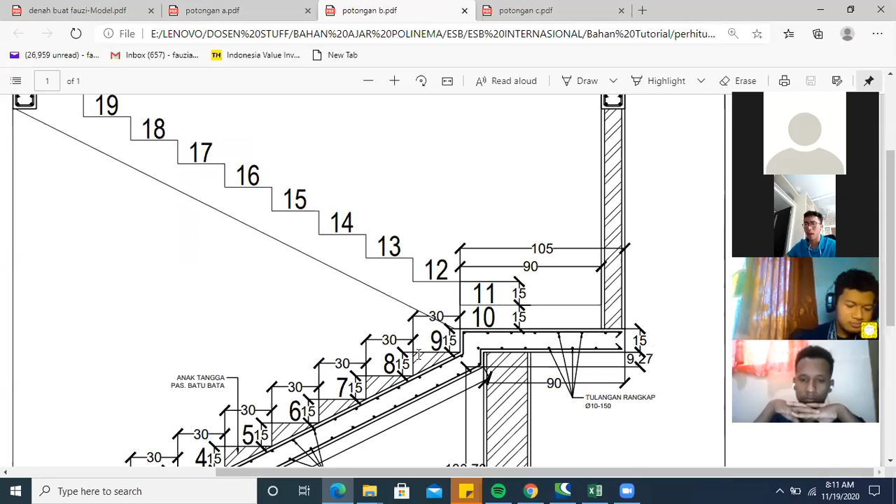Okay, there's two types of stairs. The one is the stairs using footsteps, atau anak tangga di sini ya. Footsteps using the bricklaying. Based on this drawing, this is the example of the stairs commonly used for house construction. They use the bricklaying as the footstep.

But another one, there is a footstep using the concrete, like what we saw in the previous project yang kita kemarin ya, minggu lalu itu. In the last week, we already went to the project where the stairs use concrete.

What's the difference? The difference is when you use the stairs for an ordinary house, you can use footsteps from bricklaying. Meanwhile, when it's a building where a lot of people use it, you have to use footsteps from concrete. And of course, if you use concrete inside the footstep, you must put some reinforcement.

In this drawing, if the contractor uses reinforcement, the position of the reinforcement will be like this one. Okay. This is the example if the footstep uses reinforcement. Okay. Is that clear, guys?

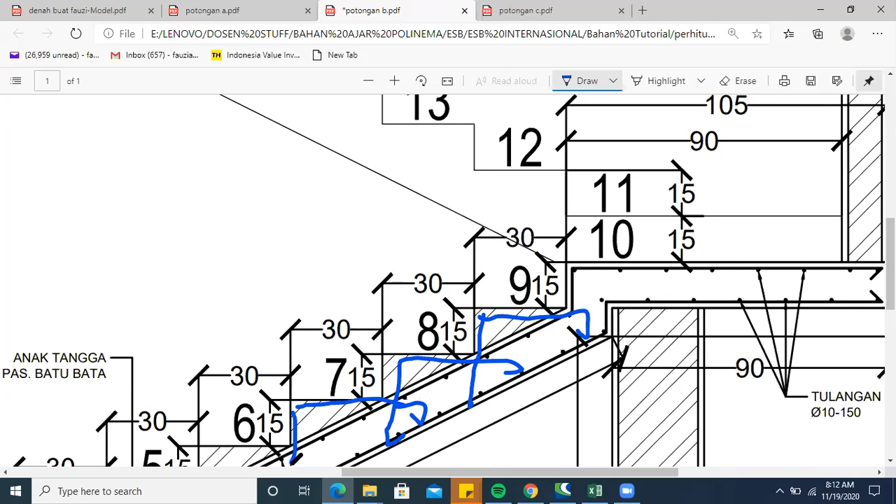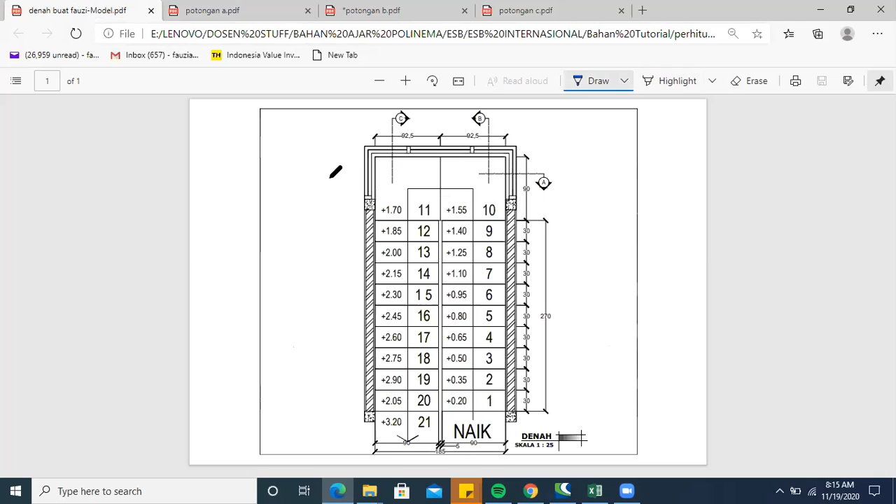Jadi bisa baca gambarnya ya. Because this drawing makes a section like this ya, ingat ya panahnya ke sini, maka kita akan seolah-olah melihat dari arah sini. We will see from this point of view. Okay. Nah, this is the detail after we make section B. Based on this drawing, we also get the information that this is the form of the reinforcement that we will use for this structure.

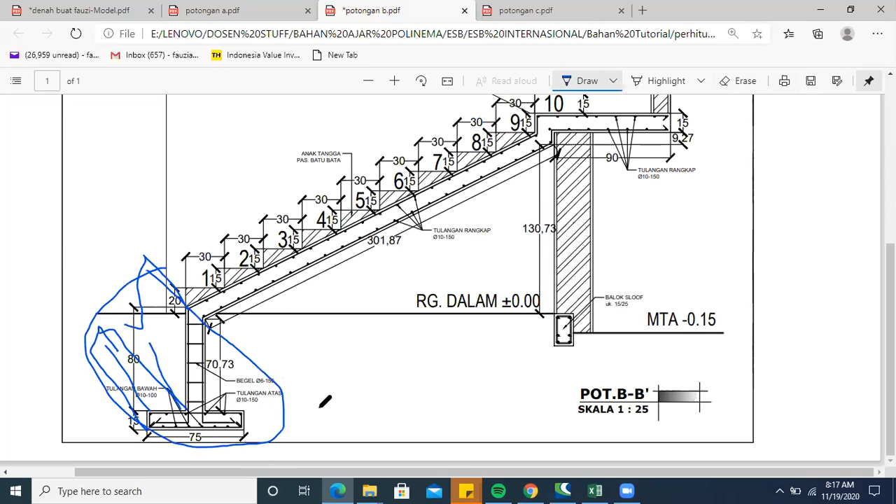Nah, the first step that we have to do is calculate first, section by section. Okay, let's focus on this point. I will cut from this point and just focus on the foundation first. Let's start to calculate the reinforcement for this one. First, we have to analyze from this drawing what diameter this reinforcement is.

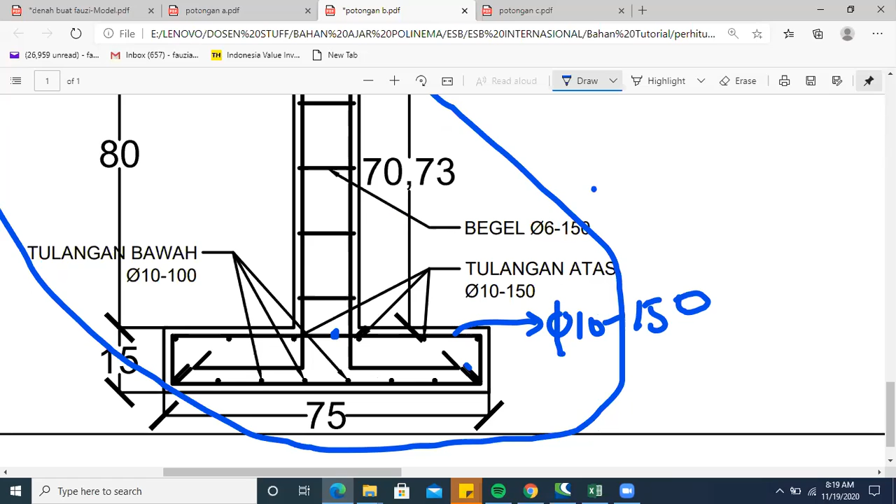Okay, we have some missing information. We don't have any idea what kind of diameter this one is. Okay, let's assume that we use diameter 10 and the spacing is 150. Kita pakai 150 aja. Okay, now we focus on this one. We focus on the reinforcement.

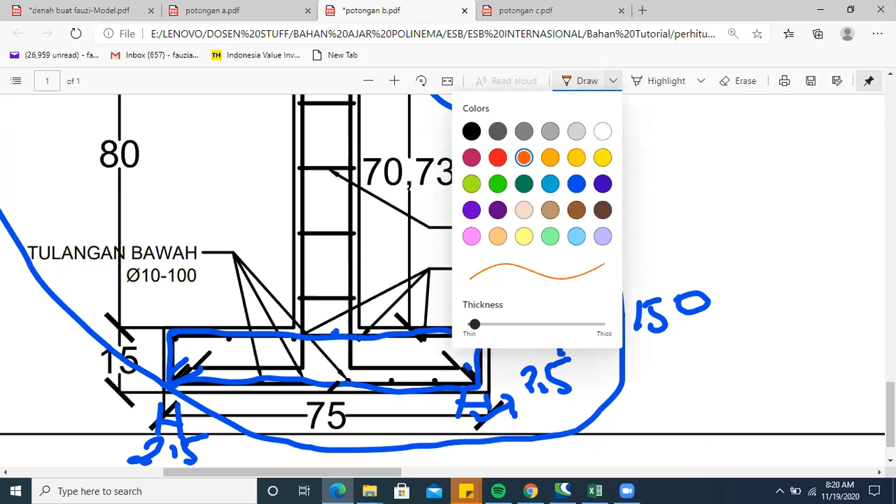Okay, let's assume we use concrete cover 2.5 cm. This one is 2.5 cm. So we can assume the length for this one, berapa? 75 kurangi 5 berapa? 70. 70 over here. This is 70. This is also 70. Sini berapa? 10. Ini 10 cm, ini 10 cm also.

Hooknya berapa? Biasanya kita pakai berapa ya? 5 kali diameter. 5 ya biasanya. Okay, we use 5 over here and we use 5 over here.

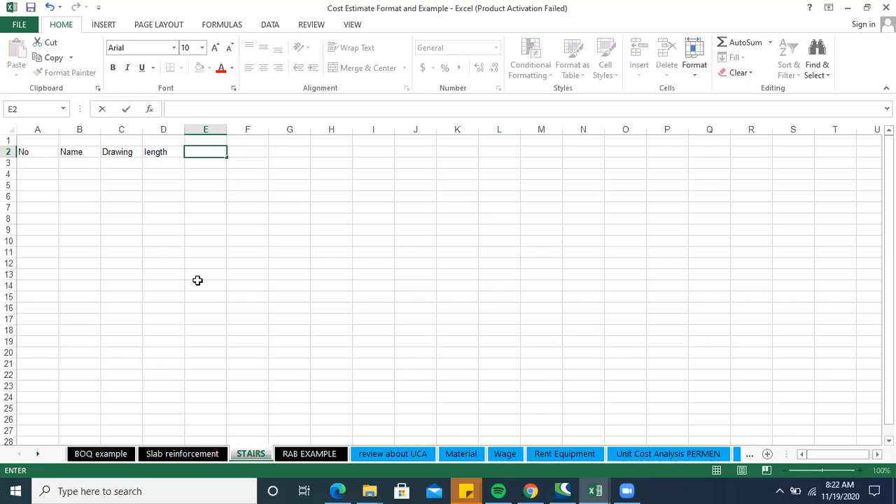Okay, I will make this column number and then name, or you can make a drawing for example. Boleh juga kalian pakai gambar di sini. Kemudian length, kemudian n or number, and the total length.

Okay, number 1, we can say the name is apa tadi? Footplate. Square footplate 1 for example. We name it footplate 1, and perhaps you can make an additional drawing. Over here you can make the sketch of the drawing.

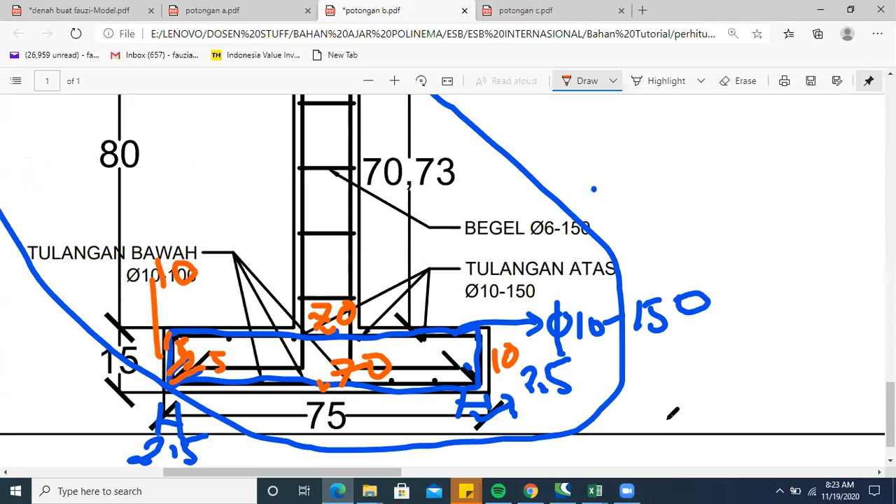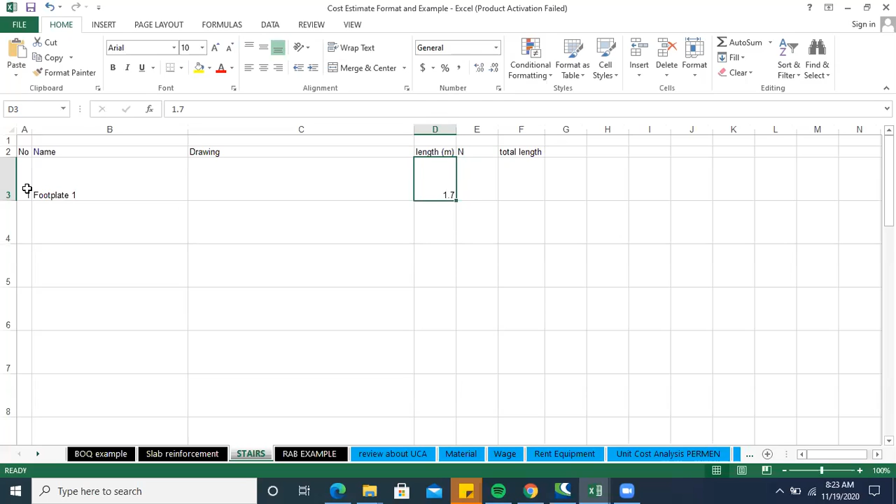Kemudian length-nya tadi berapa? 170. Okay. The length is 1.7 meters. Anyone still not understand where 1.7 is coming from? No? Clear? Okay. We have length for footplate 1 is 1.7.

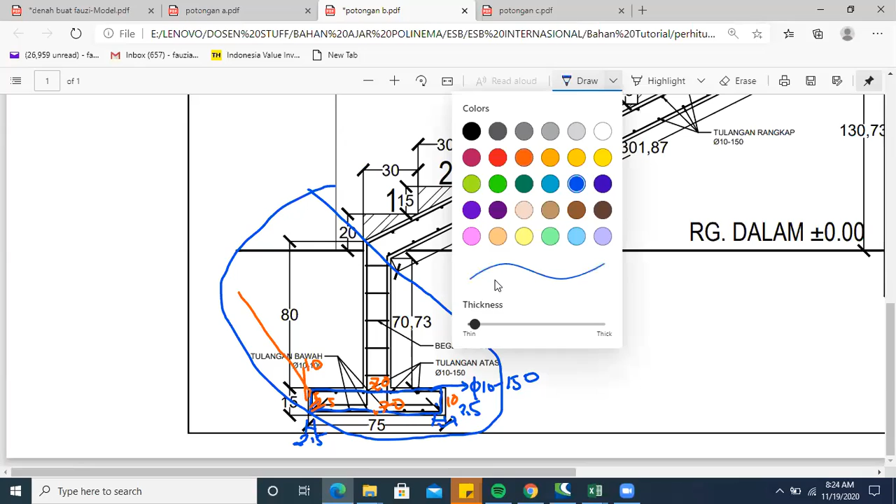And then what do we do next? Cari jumlahnya. Yep, we will calculate how many stirrups with this kind of dimension. How can we see that information? Okay, this is the continuous foundation, guys. So you have to see the drawing. I will ask you, berapa panjangnya ini?

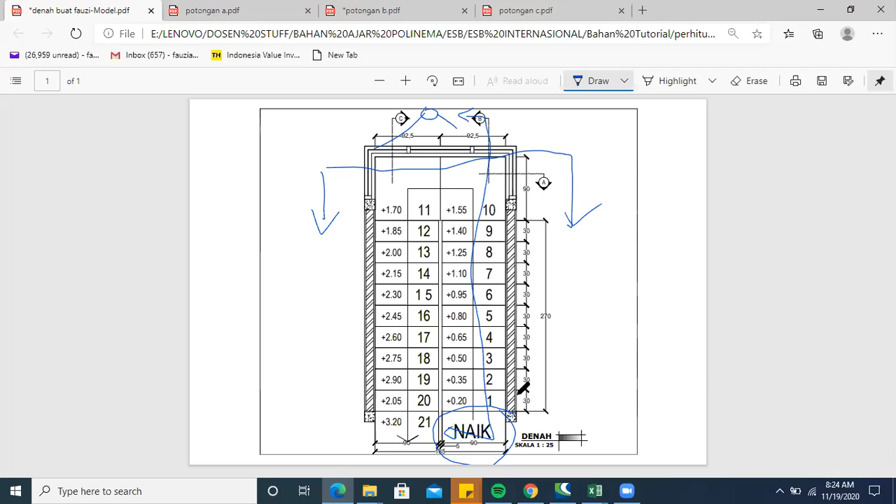So the length is 90 cm. Now I will ask you, how many stirrups do we have to put on that part? If the length is 90 cm and the spacing is 15 cm, how many? 90 divided by 15 plus 1. 7. Do you remember that? Okay. 15 is the spacing, guys.

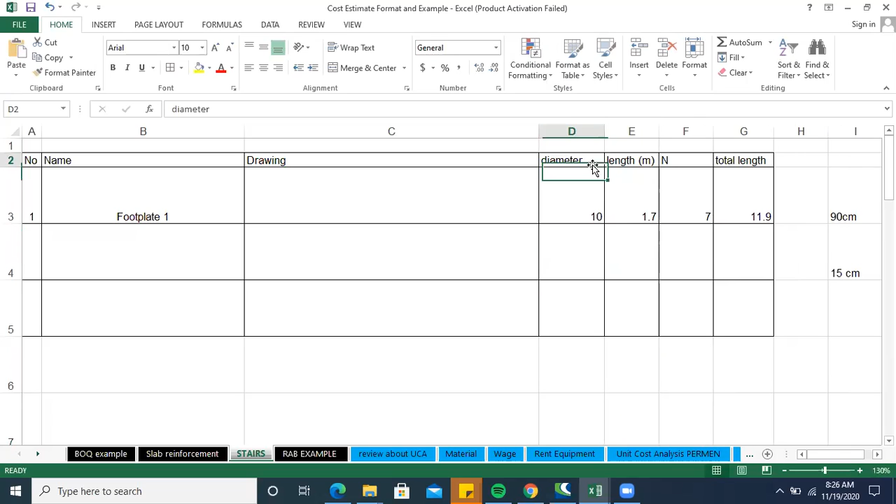Meanwhile, we try to calculate the quantity of the stirrups. So you have to add 1 to the quantity. Okay, we find the quantity is 7. And then we can calculate by multiplying 1.7 by 7. That's how we get the total length. Diameter 10. Okay, clear enough? Any question?

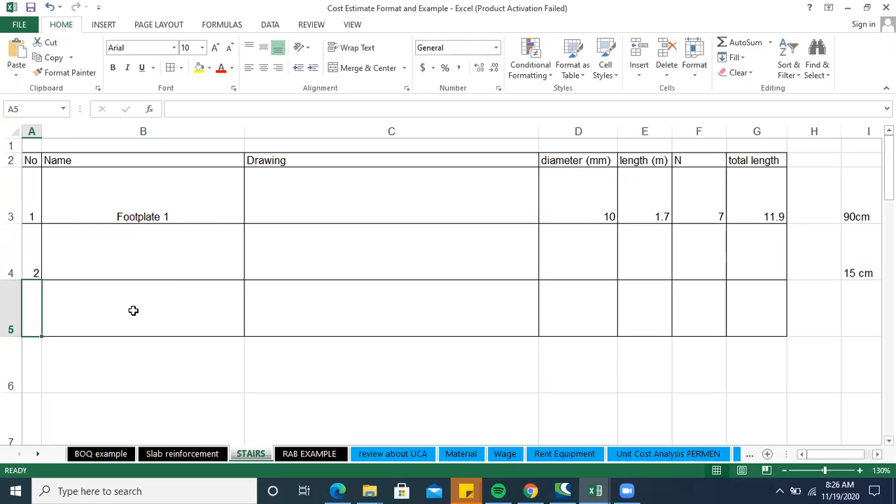Okay, let's go to the second one. Footplate number... footplate number mana lagi? Oke, saya hapus dulu.

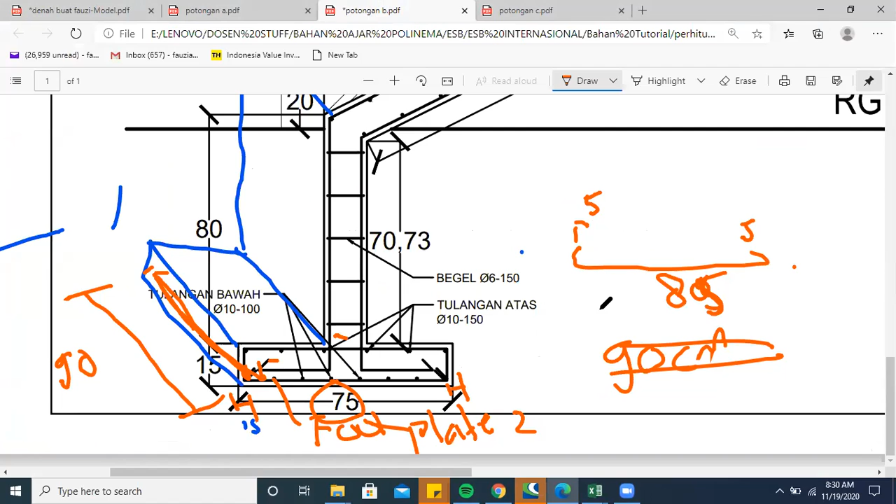So, the calculation will be 75 divided by 10 centimeters plus 1. 8.5, we can round it up. Tahu ya round up? Round up berapa digit? 0. Kalau 0 itu pembulatannya langsung ke atas. And then we can multiply again. This one. Okay. 8.555. Remember, this is in meters notation.

We do the same way for the top level. Diameter 10, same. The length should be the same. The quantity will be different. We simply change the spacing to 15, and the quantity is 6. The equation is the same. Okay.

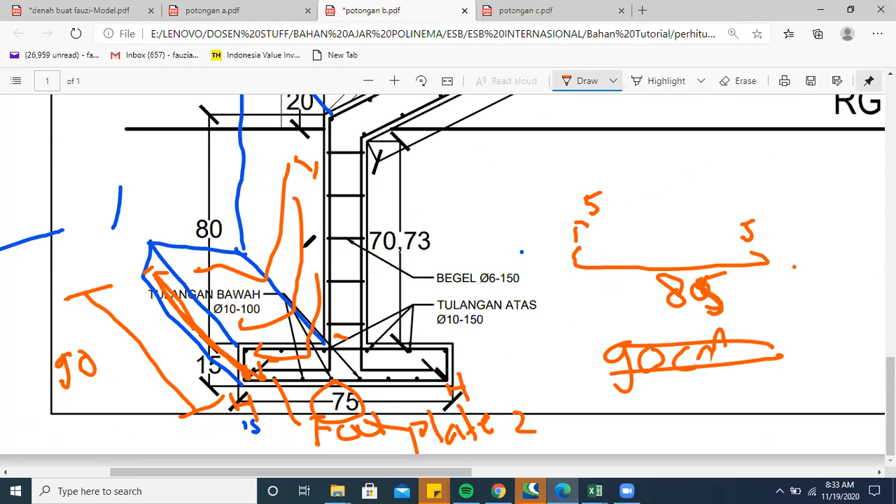The problem is this drawing is not detailed in giving that information. Jadi kita make our own assumption, boleh kah? Okay, let's make our own assumption. For example, I will cut until this point, and for this reinforcement I will make the diameter 10, and the spacing I use 20, 200. Boleh ya. And then, what do we have to do next?

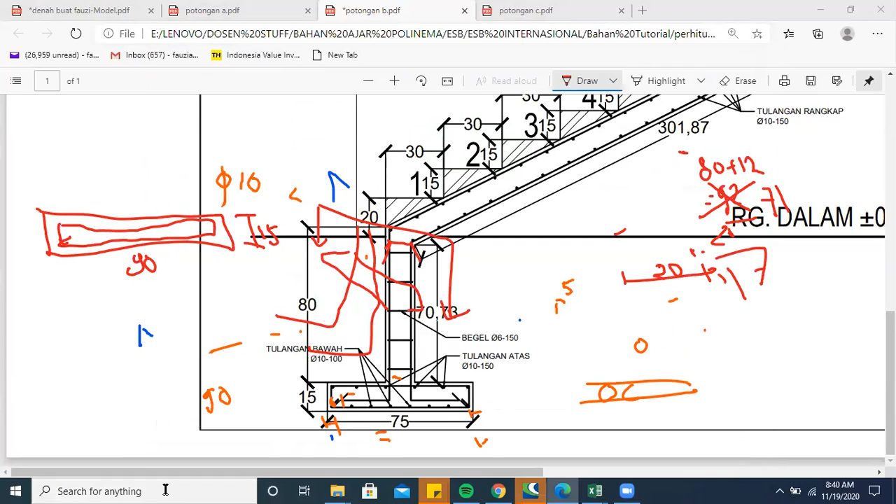Okay, guys, I will make a 3D modeling for the foot foundation. Okay, model info. Then I will change the unit of measurement. And then, okay, so what's the size? 90 by 75? 90 by 75, sir.

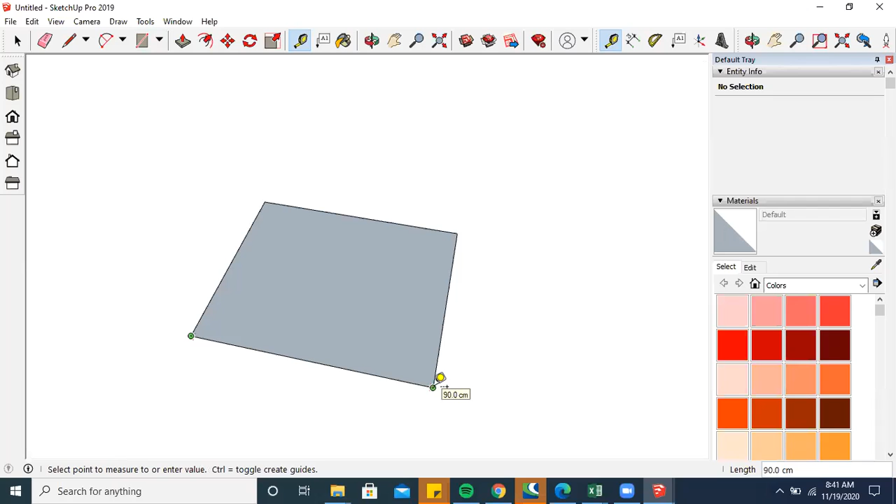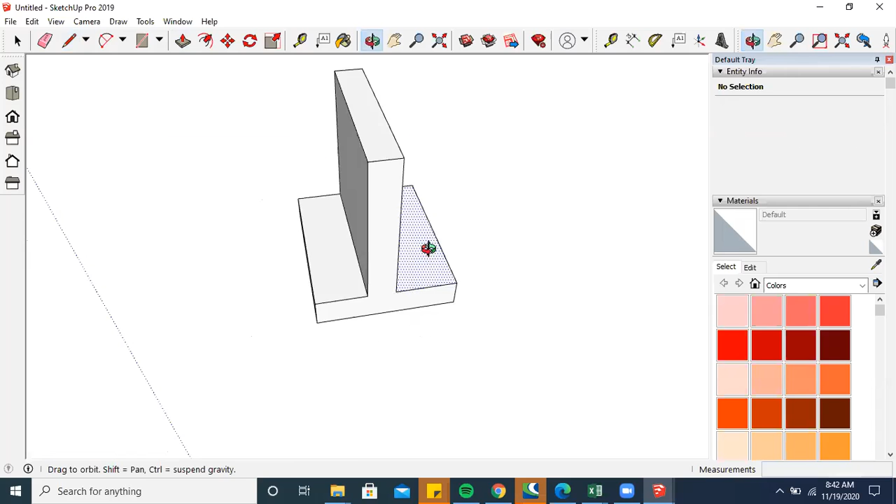90, okay. Push, the thickness is 15 cm. Okay, this is the example of the foot plate. And then, based on this drawing, let us show this is 15 cm. I will take the line over here, 7.5. Sorry. Okay. Do you understand this drawing, guys? Okay. This is the example of... Oh, sorry, wrong direction. Okay, I will make the stairs over here.

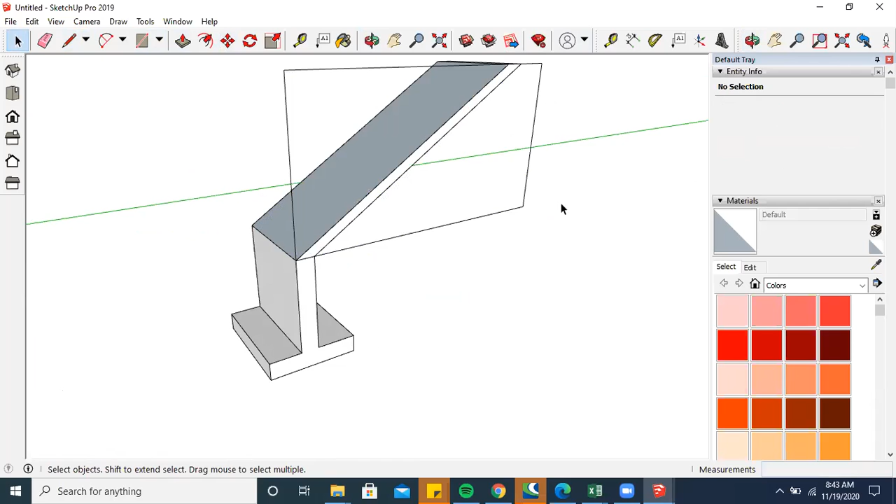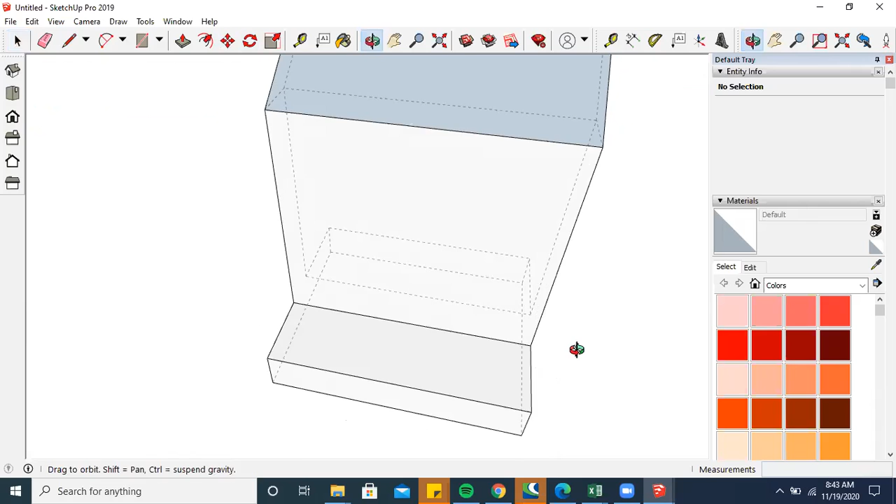Now, inside of this one, of course, we have the reinforcement surrounding this point. We call it stirrup. So if I have to make the section of this drawing, I will make a section. Section plane. Okay, let me show you. This is the example of the section. Can you picture what I mean? So this is 90 cm and this is 15 centimeters, guys. Okay, clear enough? Yes, sir. Clear enough.

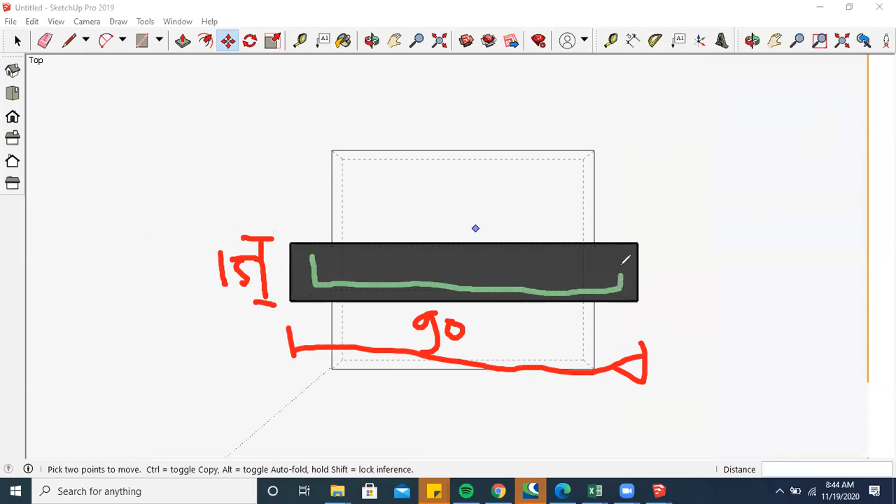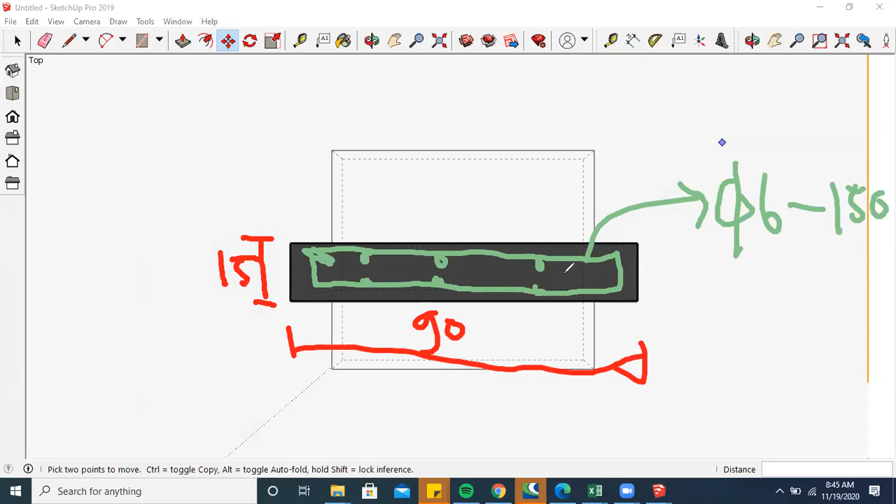We have stirrup over here, and there is a lot of main reinforcement over here. Based on the drawing that we got, we get the information that the spacing is 150. So in this drawing we use diameter 6 with spacing 150. Alright? No question?

So, how long is the stirrup? 190. Does that include the hook? Not yet, sir. With two hooks, so 200. Okay, 200. The calculation is stirrup, using 6 millimeters and then 2 meters.

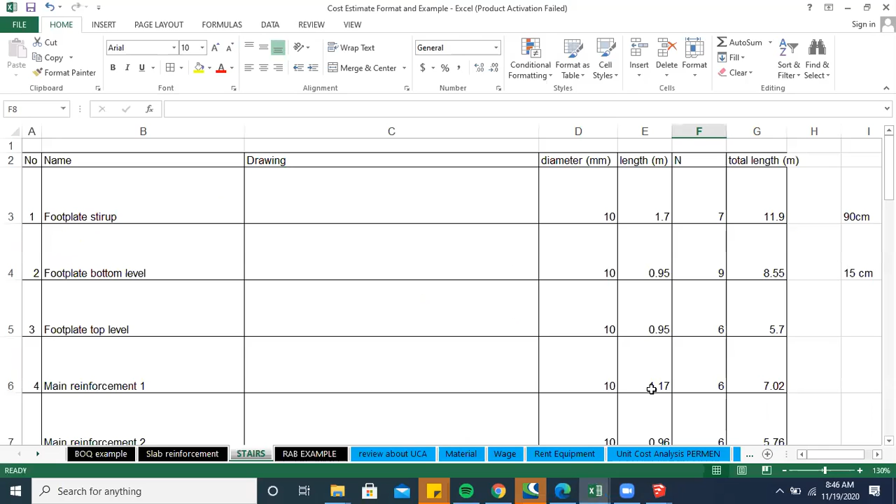Okay, the next question, how many stirrups do we have to put on that construction? How do we see it? From here, 70.73, around 71. Okay, 71 or 70, that's okay. So we just calculate. Round up. We have 70 for height. Then what was the spacing?

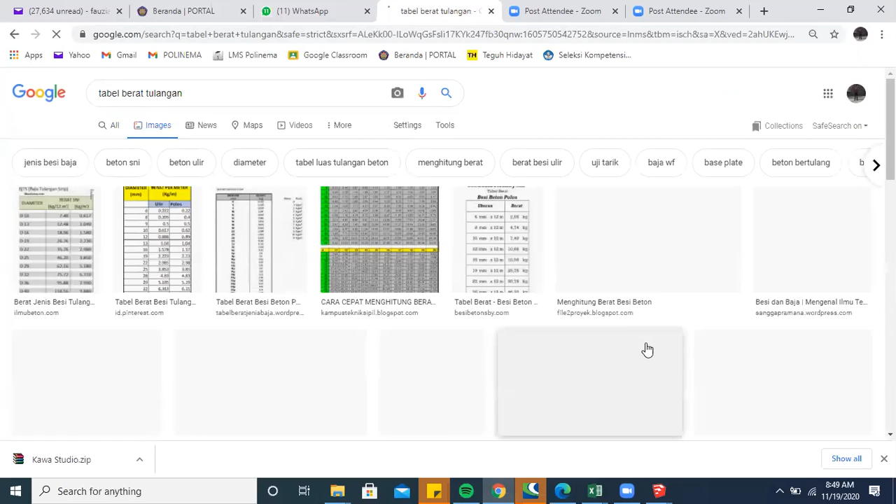Okay guys. Based on this table, I can get the information for each meter of rebar. For example, in my calculation, I'm using diameter 6 plain and the weight is 0.22. So I can directly use the weight for diameter 6 over here, 0.22. Is that clear, guys? Paham nggak ini maksudnya? Ini satuannya kilogram per meter.

And then we can do the same way for diameter 10. Diameter 10 from this table has a weight of 0.62. We can put 0.62 over here. And then we get the weight by multiplying the total length and the weight per meter. Okay, that's it. We get the total weight for the foundation, in kilograms.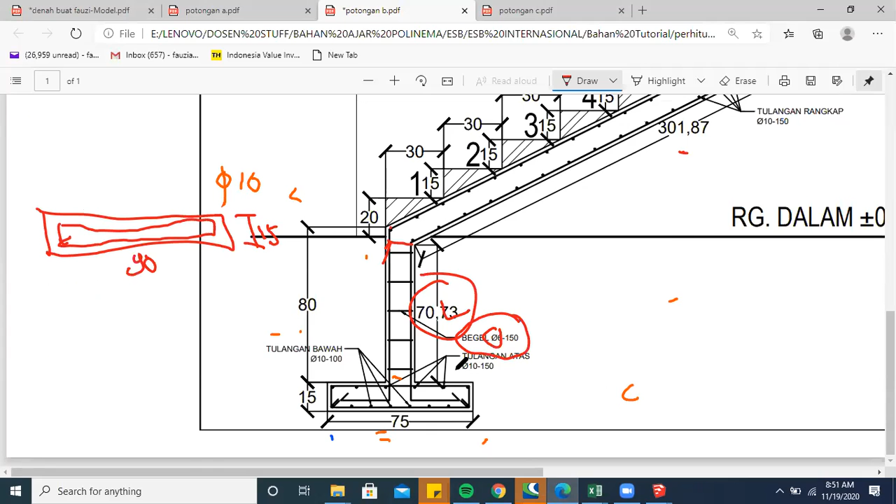The question is how we can distinguish between plain and deformed. We can see directly from the notation over here. This is the notation for plain. Jadi ini pakai polos semua. If the notation is using D, diameter 10 for example, nah, ini baru pakai ulir. Ngerti Mas ya? Oke Pak.

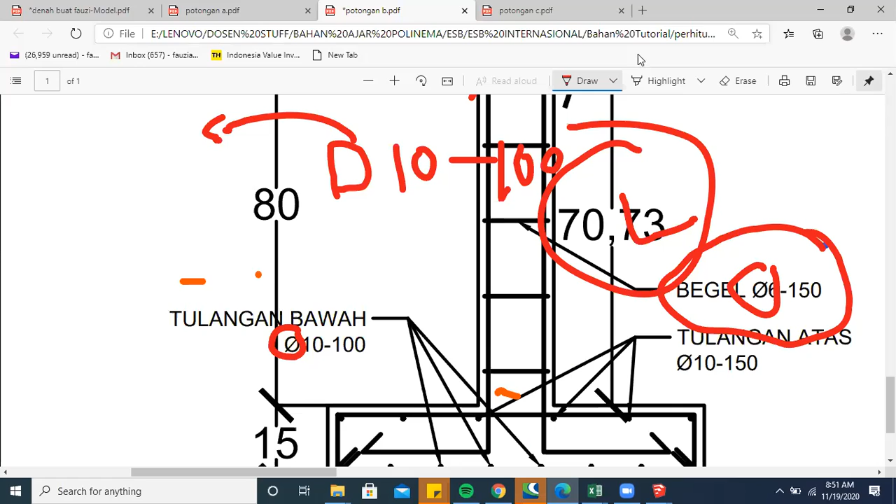And I think, if you want to build a house with only 2 floors, it's common to use plain rebar. Using deformed is too wasteful, too expensive. Okay. Another question? No question. Okay, if there is no question, let's go to the next part.

We will calculate the reinforcement for the slab. Slab itu adalah plat. Stairs ini adalah plat juga, cuman miring bentuknya. This is a plate but with a direction that has an angle. When you want to calculate the reinforcement over here, the way is the same as the plate.

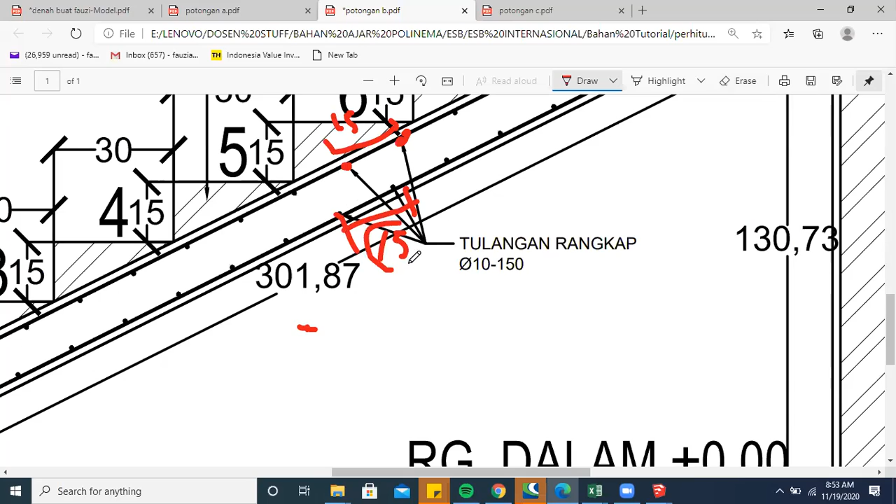Okay, first what you have to do is find out the spacing between one reinforcement and another. Based on this drawing, the spacing for this and this is 15 centimeters. Same with the bottom level, 15 centimeters. Dapat dari sini ya. Diameternya 10.

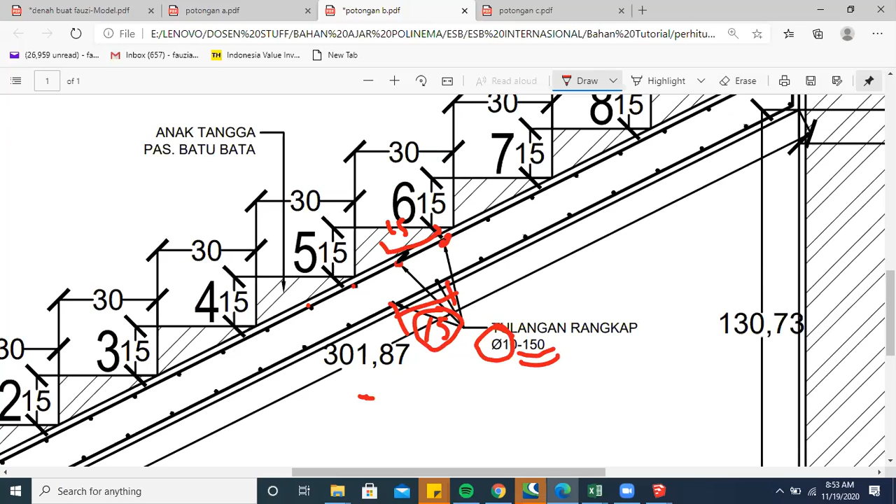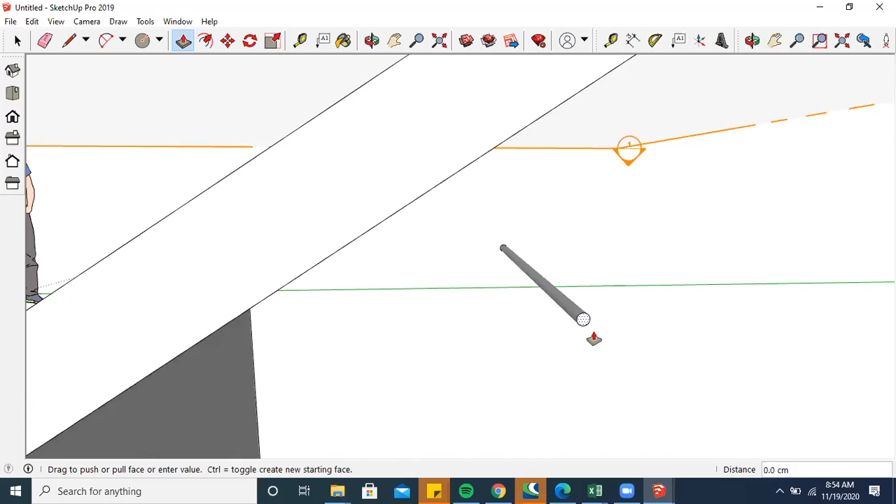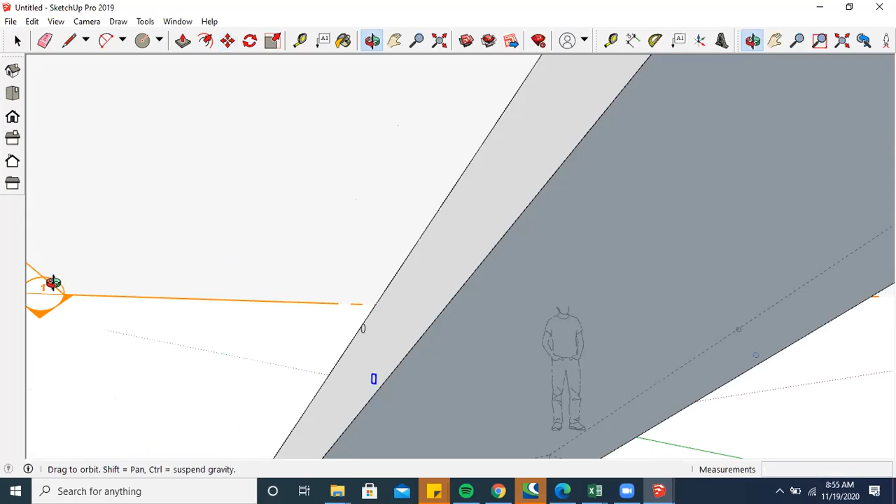Okay guys, from the drawing over here, the reinforcement will be in this position. This is the example I'm using; we assume this is the rebar. The position of the rebar will be on this one. This is rebar, and we must also put another rebar on the bottom level. Tapi memanjang ke sana ya.

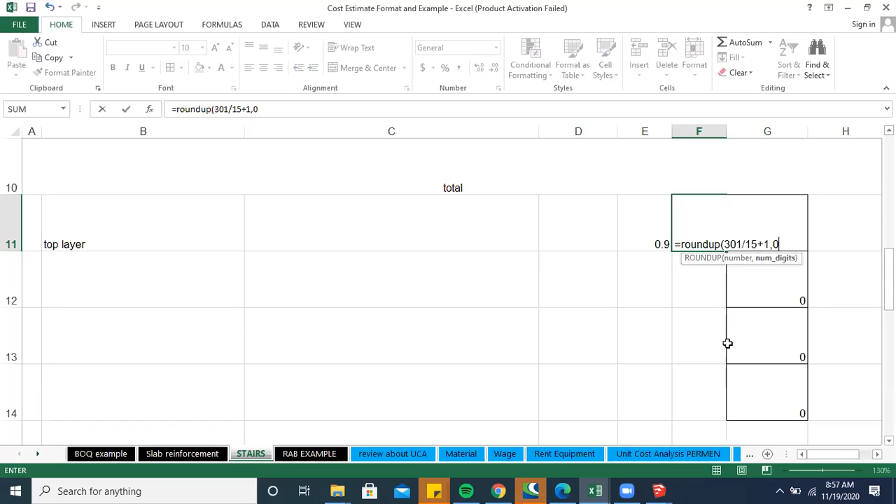Okay, we need 22 only for the top layer. Meanwhile, the bottom level will be the same, bottom layer. Ngerti nggak guys sampai sini guys? Gampang ya? Cukup paham, gampang ya, oke ya.

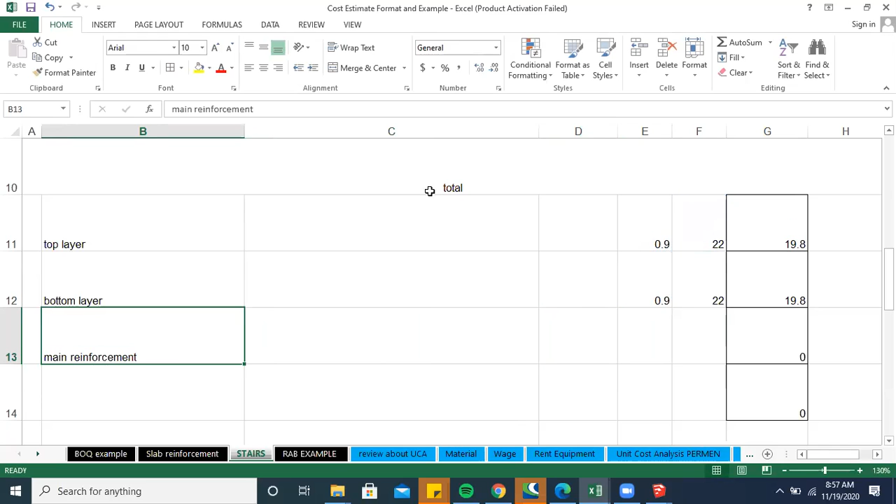Oke, itu yang melintang saja. Yang memanjang berapa dong? Yang memanjang ini ya, nah yang panjang ini set. For this one, we will use the calculation like the previous one. Ini kan ada tuh tadi jumlahnya, jumlahnya ada berapa tadi? Nah, ini ya, main reinforcement tadi, jumlahnya itu ada 6.

We have 6 of the quantity for the main rebar. Oke, dan panjangnya berapa tuh main reinforcement-nya? 301, nah 301 ya, atau 302 lah boleh. 302, nah 302 cuman 2 kali atas bawah ya. Nah gitu ya, ngerti ya caranya ya?

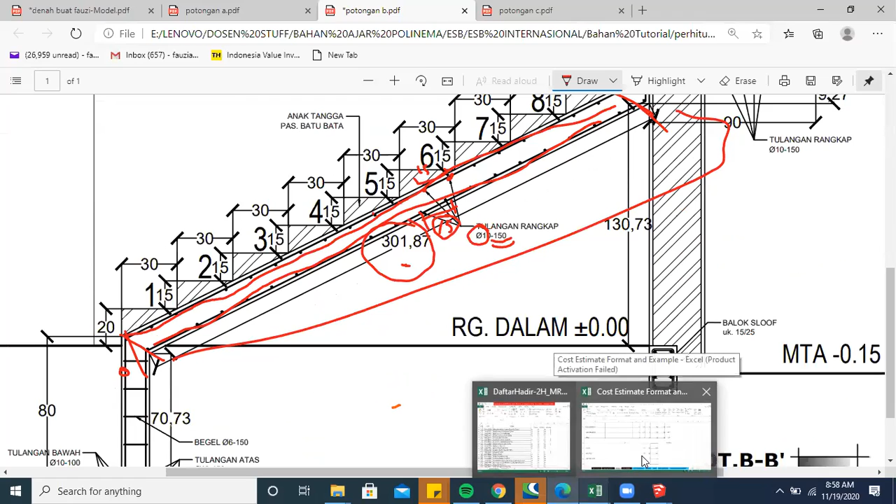Main reinforcement top layer lah misalnya ya. Kemudian jumlahnya 6, panjangnya tadi apa? 3,02. Oke, we do the same for the main reinforcement in the bottom layer. And the total length, let's make same ya.

Oke, selesai sudah ya, kalikan saja nih. Ini pakai diameter berapa tadi? 10 ya.

Kalau diameter 10 beratnya itu 0,62 per meter. For each meter, for diameter 10, the weight is 0.62. Okay, and then we just have to multiple between the total length and also the weight. Enter, and we do the same calculation for all the part. Oh sorry, ini 0,62 semua ini ya.

Okay, and then we just have to summarize the total weight of the reinforcement. Oke guys, sudah pahamkah? Ada yang ditanyakan?

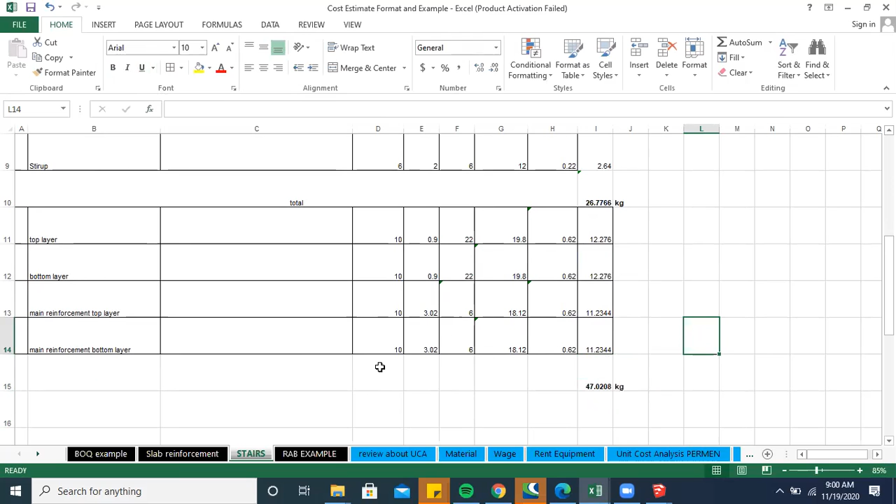Saya rasa sampai situ ya. Jadi yang atas gimana? Sama, caranya sama saja. Ya, caranya sudah sama, ini kamu hitung aja ini tekukannya berapa panjangnya, ini tekukannya berapa panjangnya, jumlahnya berapa banyak ke sana, nah itu ya. That's how actually you calculate the reinforcement for the stair.

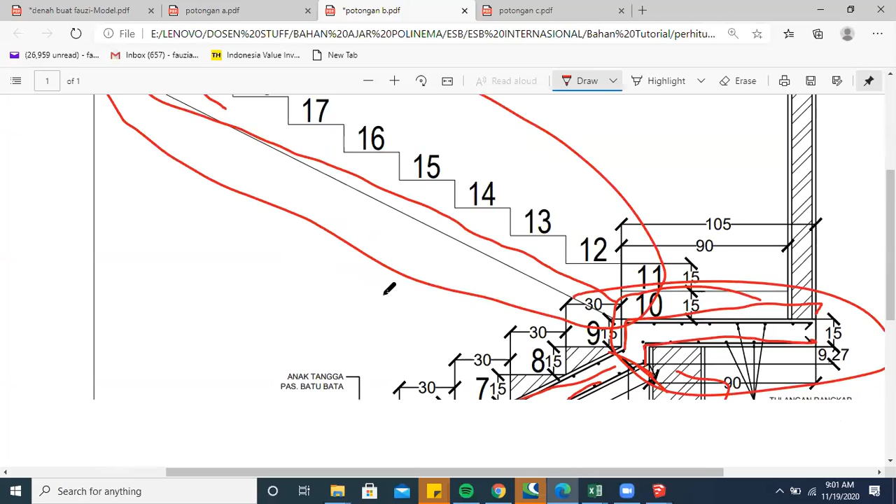You have to do the same way to calculate for the reinforcement in the second layer of the stair. Ya, Anda bisa lanjutkan hitung yang ada di sini. Or when you are very boring to calculate detail, aduh ini berapa ya enaknya nih? Udah, kalian pakai angka yang sama dengan yang ini. Bisa juga dengan kayak gitu caranya ya, dikalikan 2 gitu. Ya, if you are boring to calculate very detail, you can simply use your previous calculation over here from this part.

For example, we find 47 kilogram. You use the kilogram for this part same like before. Itu juga bisa juga caranya kayak gitu. Okay, is that clear, guys? Any question?

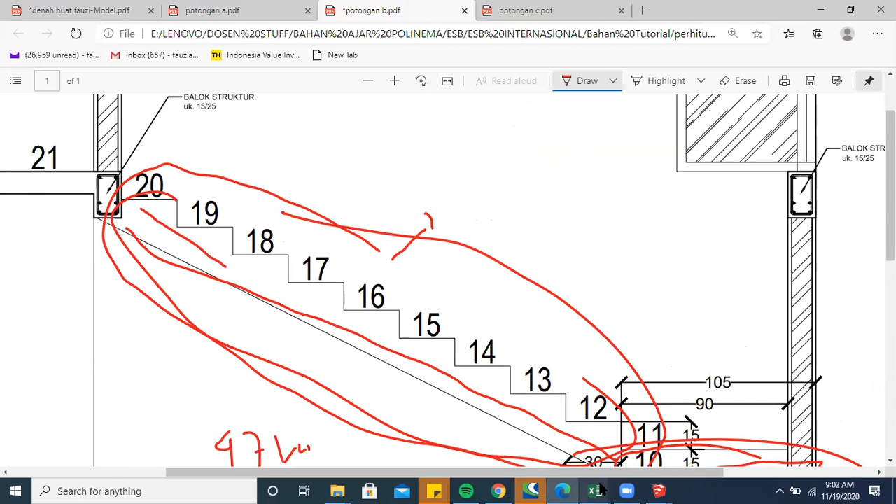Oke, ada yang ditanyakan dulu? Ada yang punya masalah, kendala? Kalau misal di gambarnya nggak ada itu Pak, diameternya apa kita bikin terserah Pak? Bikin sendiri aja. Sebenarnya pakai diameter ya 10 bisa.

Kalau saya harus mendesain tangga ini sendiri ya, if I have to design by myself these stairs, saya akan pakai diameter yang ini yang panjang. Itu pakai diameter 10, Mas. Kemudian yang melintang ini saya pakai diameter yang kecil-kecil aja, diameter 8 atau diameter 6. Dah itu kalau saya ya. Baik, Pak, jadi asumsikan sendiri aja, Mas. Terima kasih, sudah kuat. Okay, another question.

It will be very complicated, guys, for the reinforcement, yeah. But basically, all the calculation of the reinforcement is almost the same, yeah. The principle is you have to calculate how many bar or section of the bar, and you have to calculate the quantity of the same bar, yeah. And you just have to multiply between the length for this section and the total of the quantity of the bar. And then you just have to multiply with the weight for each meter for those reinforcement. That's all same ya, kira-kira sama semua, caranya kayak gitu, untuk reinforcement, oke. Okay.

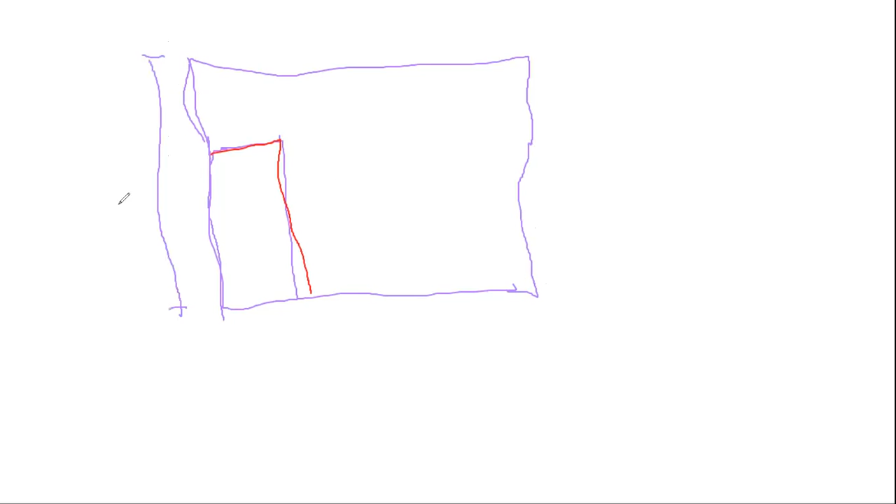Okay, let's assume I have part of a wall. For example, the height of the wall is 3.5 meters, and my room here is 4 meters. This is a door, and the door has a height of approximately 2 meters.

Do you know the width of the door? 80 centimeters? Too small. 90, yes, if it's a bedroom use 90 centimeters. Okay, ring balk or balok latai.

Ring balk is on top, yes. Balok latai or the beam, the lintel beam, its position is on the top level of the door, here. This is the position of balok latai, guys. Abdul Rahman, do you know that? Yes, sir. Okay, that is balok latai.

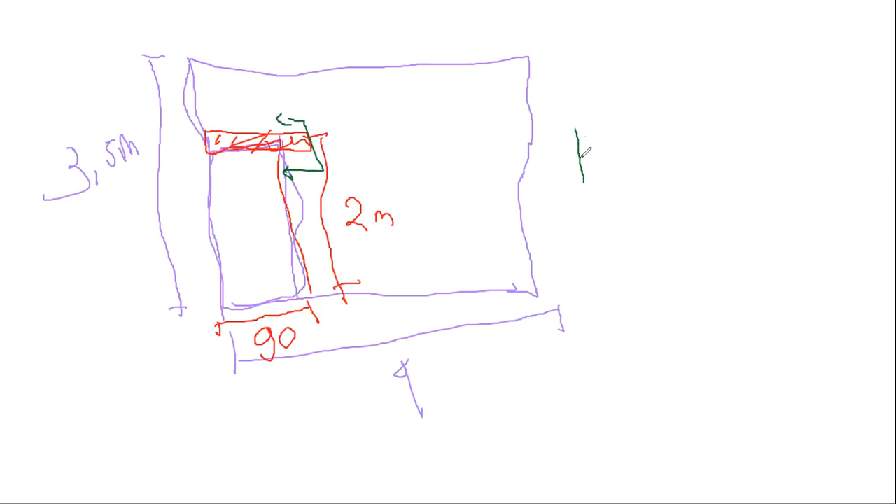If I have to make a section, it will be the same as a beam, yes. They have reinforcement over here, for example this one.

Let's assume this is using diameter 8, and I tie it with a stirrup of diameter 6, with a spacing of 10 centimeters, for example. Okay, I have 4 bars of diameter 8 over here.

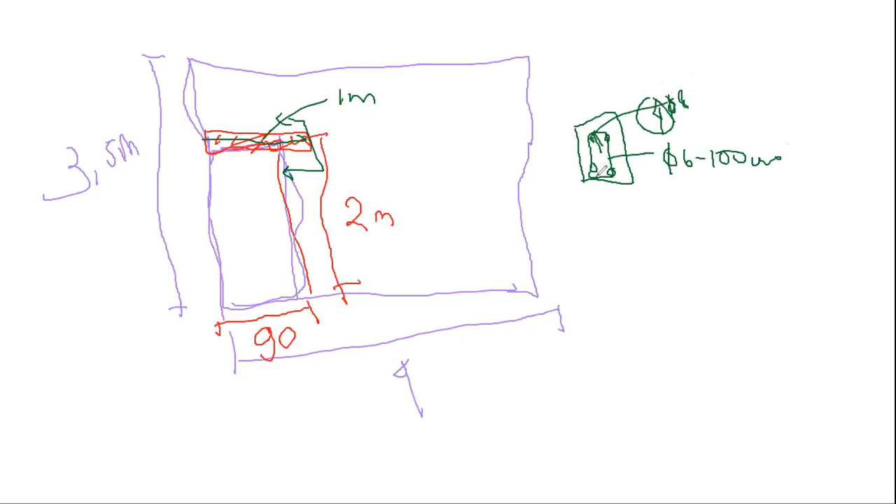Now, how to calculate? You just have to simply measure the total length. Let's assume the total length is 1 meter for the reinforcement. Since you have 4 main reinforcement bars in this balok latai, you just multiply 4 by 1, and you will find the total is 4 meters. Remember, 4 meters is for diameter 8 reinforcement.

Diameter 8 reinforcement, based on the table, has a weight of 0.4 kilograms per meter. Then you have to multiply the weight of the reinforcement, 0.4 kilograms per meter, by 4, and you will find 1.6 kilograms.

Okay, Abdul Rahman, then you have to calculate the stirrups and find how many stirrups you need for each balok latai on top of the door. And then, for example, you find that the weight is 1 kilogram. So the total weight for one balok latai is 2.6 kilograms.

Okay, Abdul Rahman, is that clear? Yes, sir, it's clear. Okay, 2.6 kilograms means this is the reinforcement for one door. You just have to see your plan and find out how many doors exist in your plan, then multiply 2.6 by the number of doors. That's it, you can find the weight for all the balok latai. Is that clear? Clear. Okay.

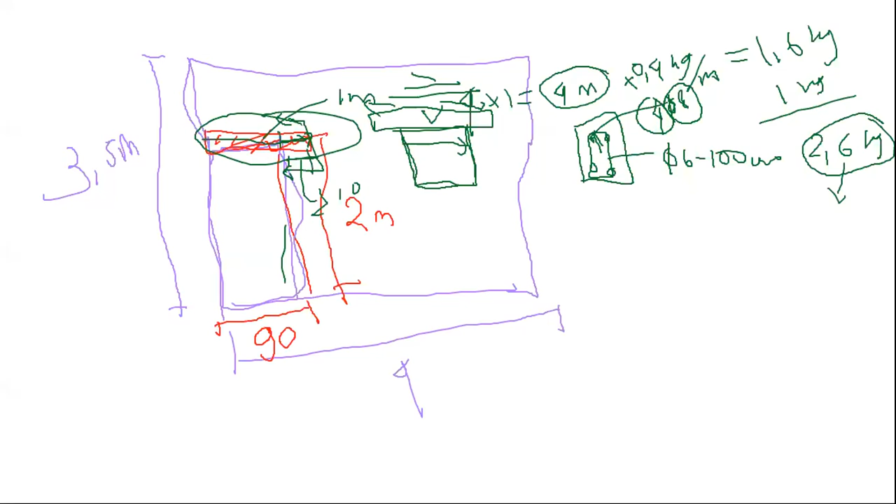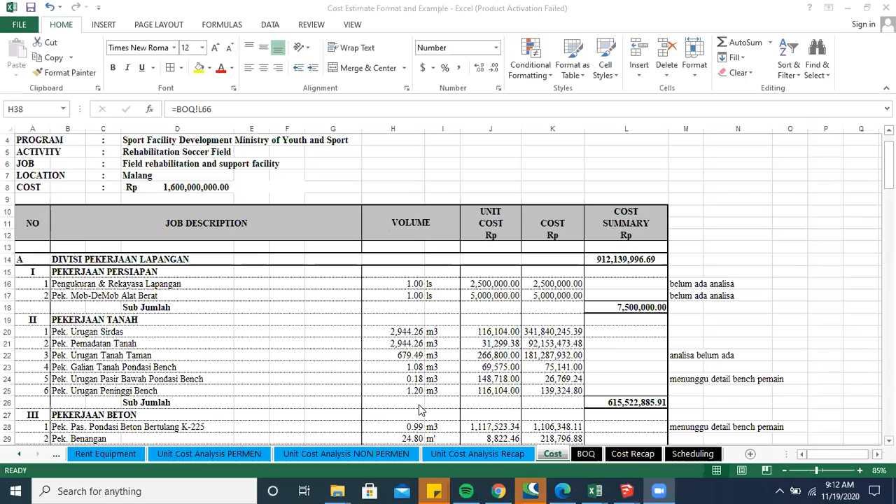Okay guys, the components of cost estimation are basically number, job description, and volume. We spent a lot of our time from week 2 or week 3 until now to calculate volume. Oke, betul nggak? Kita tuh habis banyak waktu buat hitung volume di sini.

We spend a lot of time to calculate the BOQ or bill of quantity. That position is over here, guys, yang posisinya itu di sini. Why? Because that's actually the most difficult part when you want to do cost estimation. You have to understand the drawing, you have to understand how to read the drawing. That's the problem. If you're not able to read the drawing, you will never be able to calculate the cost estimation, especially you will never find the quantity of the work.

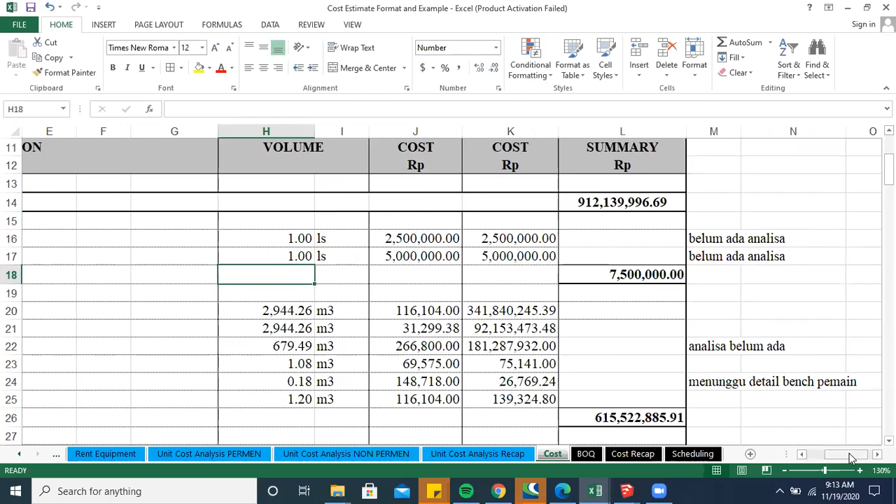Okay, now after you find the quantity of the work, the next step is you have to multiply this volume with the unit cost for each quantity of work. In this example, I have the work of earthwork. For example, let's see this one item of work - I can say this is soil excavation.

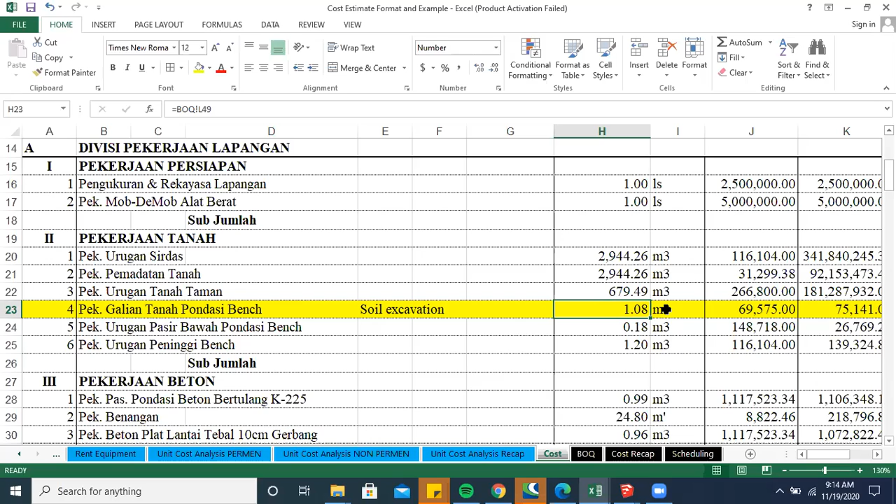Soil excavation, based on my calculation, I get 1.08 cubic meters. Remember, this is what we've done until this week - we calculate the quantity. Next, you have to find the unit cost for each cubic meter of soil excavation, this price, and then we multiply with the quantity or volume of the soil excavation, and you find the final cost for this work. You do the same way until all the job descriptions get a unit price and you get the total price, then you just have to summarize.

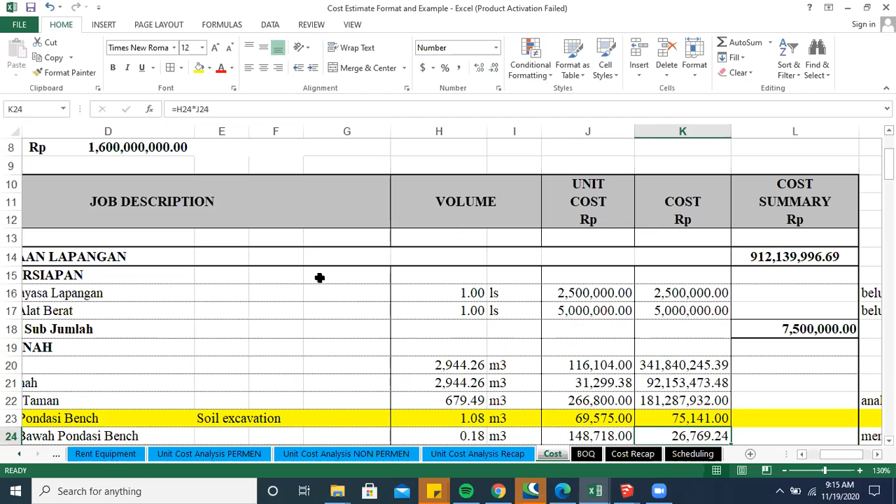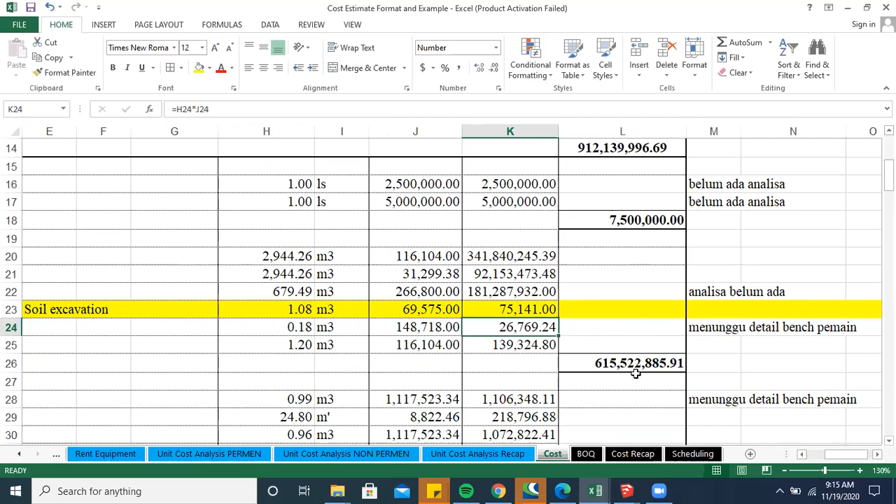For example, in the preparation work, I summarize and get 7.5 million. I do the same for earthwork and get 615 million, and I do the same for all items of work until I get the total cost. Ya, total cost-nya adalah penjumlahan dari seluruh item yang sudah dikalikan tadi. And I found that the cost estimation based on my project is 1.4 billion rupiah. Okay, is that clear guys?

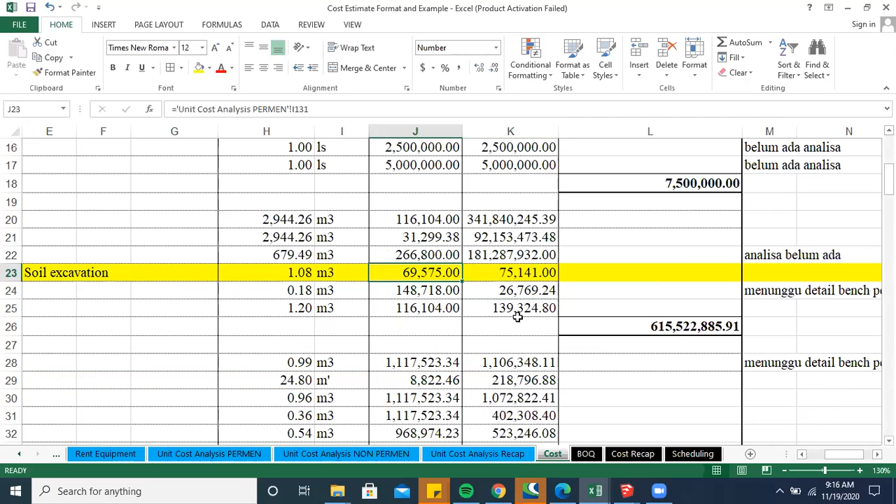Caranya gampang kan sebenarnya, cuma mengalikan volume dengan unit cost. The problem is how you can find the unit cost. If I have to go to the analysis, I think I already explained this in the previous explanation di pertemuan kedua atau ketiga ya. But that's okay, I will explain it again.

Okay guys, this is the example of cost unit analysis, atau analisa harga satuan pekerjaan. In English, I can say this is unit cost analysis. This is the example of unit cost analysis. I have worker, I have mandor or foreman - yeah, this is worker, and this is foreman. Apa ini? And then I have 0.75 and 0.025.

Apa ini? Nah, saya jelaskan di kayaknya. What is it, guys? Itu koefisien per jam, koefisien ya, koefisien or index. Okay, I already explained this in praktek bata ya kalau nggak salah dulu itu ya. Pernah kan? Pernah ya, praktek bata ya.

Jadi 0,75 itu dapat dari mana? Sudah tahu kan? 1 dibagi luasan pekerjaan yang sanggup. Jadi gini ya, 1 dibagi 0.75, I get the productivity. Jadi ini maksudnya ya. Oke, coefficient coming from the productivity, guys.

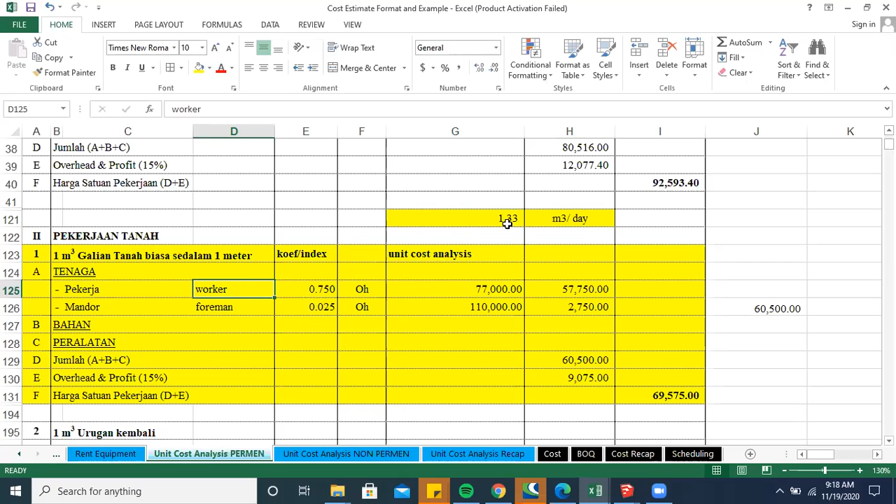First, when you want to make the index over here, you have to find out the productivity for one man or one worker. Based on the analysis or pengamatan, we can find that one worker in one day is able to do excavation for 1.33 cubic meters of soil. Is that clear guys? Jadi satu orang itu asumsinya satu hari bisa menggali 1,33 meter kubik. Day here means 7 hours of work, guys. Jadi diasumsikan satu worker itu bisa menggali sebanyak ini.

Nah, if you want to use the index, you just have to simply use 1 dibagi 1,33. Nah, ini ya, dapat 0,75. Oke, ngerti caranya ya? Jadi kalau, Pak, saya nggak dapat indeksnya, nanti dari mana? Ya sudah, kalau di indeks di SNI itu nggak ada, kamu harus ngamati orang itu kerja, lihat dia dapat berapa dalam satu hari, dan cari indeksnya sendiri.

If you cannot find the index from Standard of Indonesia, what you have to do is see people working on those kinds of items of work, find the productivity, and then divide one by the productivity - that is actually the index. Okay, and then we have the unit of measurement over here, OH means orang hari.

Or in English we can say this is man in a day. Yeah. This is OH or man in a day, and this is the salary for a worker for one day work. Ya, jadi satu hari itu bayarnya 77.000. And then I just have to multiply between 0.75 and 77,000, and I get the 57,750 rupiah. Jelas ya sampai sini ya.

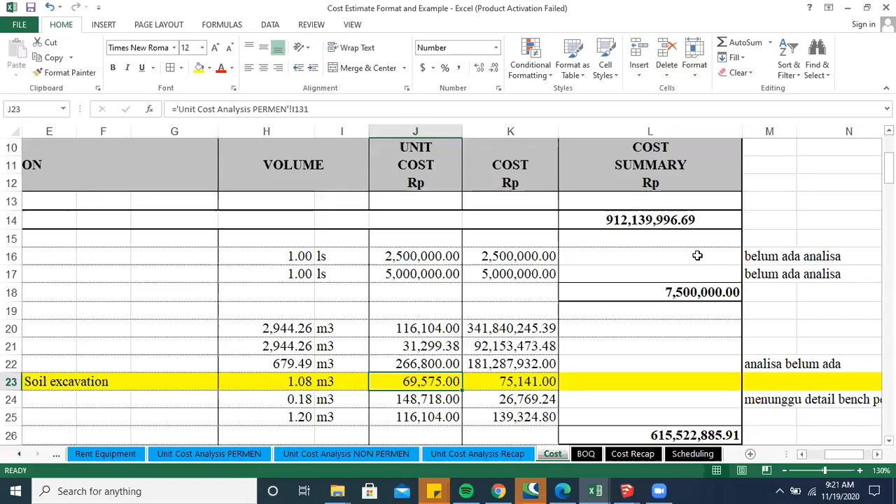The next step that you have to do is summarize all the total for the building, itu berapa banyak harganya. Nah, itulah. Di sanalah RAB dari yang kita cari. That's actually the cost estimate that we are looking for.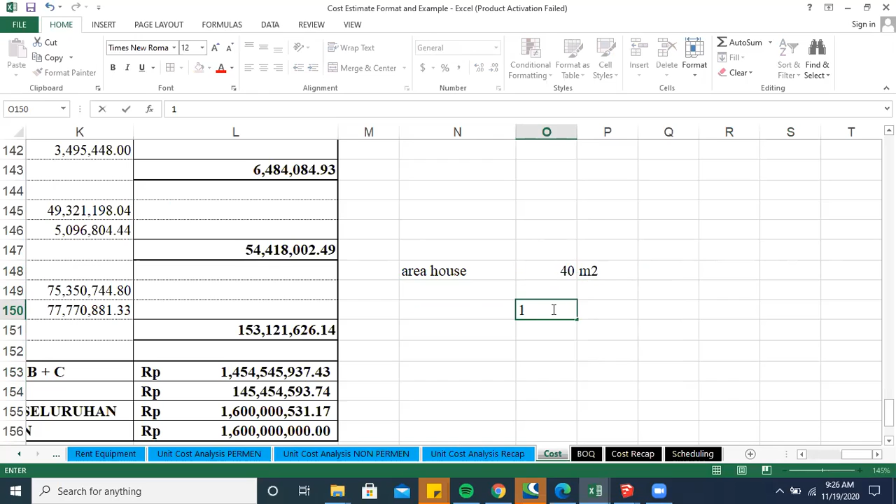Oke ya. For example, after I make a calculation with the area of building is 40 square meters, I get the number of the cost is, for example, 175 million. 175 juta. Oke. Paham sampai sini ya? So you calculate all the quantity and you find the final cost estimate, for example 175 juta.

And what you have to do next is you have to divide it between this price and the area of the house. Yeah. And I got number is 4 million. Nah, sekarang pertanyaan saya. 4 juta per meter persegi itu murah atau mahal? My question is 4.3 million. Is it cheap or expensive? I think it's cheap. You think it's cheap? Yes.

Another? Cheap. Cheap. Okay. No, this is very expensive.

Okay, guys. Let me share my experience when I had to build a house. When you want to build a simple house and you do your own work, kamu kerja sendiri, you don't hire a contractor, you construct it yourself and monitor the workers yourself. Approximately each square meter will cost this much.